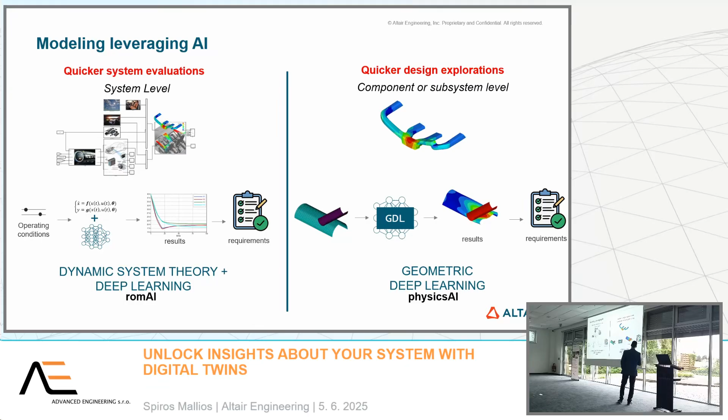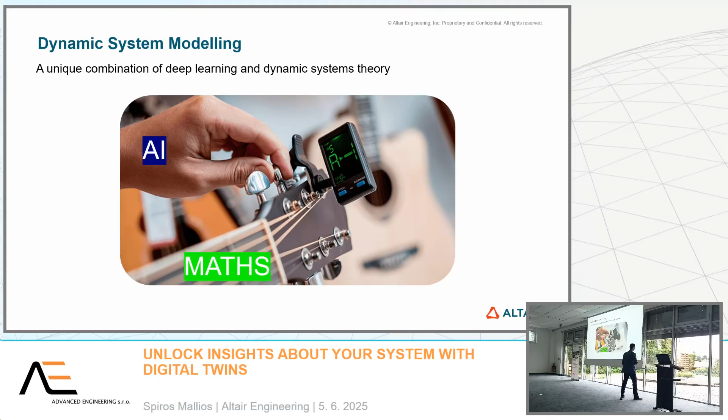This is where Altair comes in. So we have built, let's say, the tuner, which automatically, as you play, is going to identify what is the response of your system, and is going to allow you to tune your system properly. So this is what our portfolio aims to do. Just to give it to you in a graphical sense.

So more into the actual software. For this purpose, we have developed ROM AI, which stands for Reduced Order Modeling, ROM, and AI stands for Artificial Intelligence. So how is ROM AI different from the competition?

Traditional machine learning models are treating, let's say, the data in a dummy way, let me put it this way. So they are trying to estimate the time series of data. ROM AI, on the other hand, is a unique combination that is leveraging dynamic system theory with deep learning. So basically, dynamic system equations, classical differential equations, with some deep learning networks. And when we combine these two, we have ROM AI, which is basically a formulation that allows you to model both static and dynamic systems.

And all that is required from the user is a data set in a CSV format. So you can understand that it can work with data from any tool. The CSV is just exported as text.

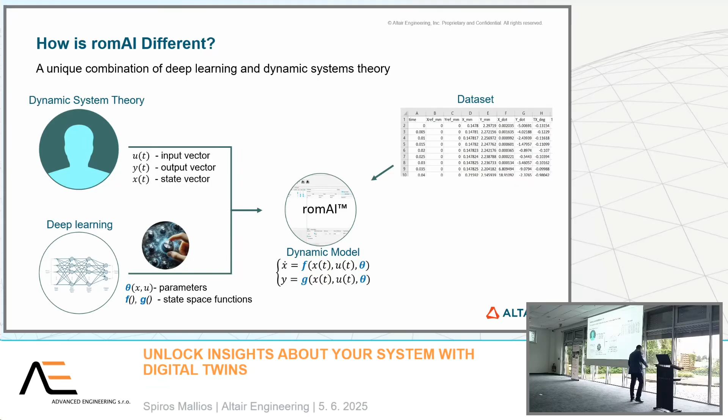Now, I will go a little bit into detail in later slides about the state vector, but state means memory, because when we want to have dynamic systems, we need to also include some memory effect in our model. And memory meaning that the next time step that I want to predict has some memory from the previous time step. So that's why we have here the state vector. But we'll see that more in detail with some practical examples.

So, what is ROM AI? ROM AI is a no-code application, right? We have developed it, like Physics AI, by engineers, for engineers. So there is absolutely no scripting required. You don't write any line of code.

It can be used with both simulation or field data. So around 50% of our customers use it with data coming from measurements, so from actual data acquisition systems.

And it can work both ways. You can build static or dynamic systems. Now, what does static mean? It means that for a given input, I have one single output. Dynamic means that for a given input, I might have a transient response, I might have an oscillation, and I don't just want the final value, I want to see also how this time evolution, how this oscillation is going to look like.

Now, one of the main benefits of ROM AI, apart from being a no-code application, is the deployment. It's very flexible in terms of the deployment, meaning that it can be deployed on hardware and on the cloud, apart from your actual PC, your laptop. That means that it can run into embedded systems, so you have microcontrollers.

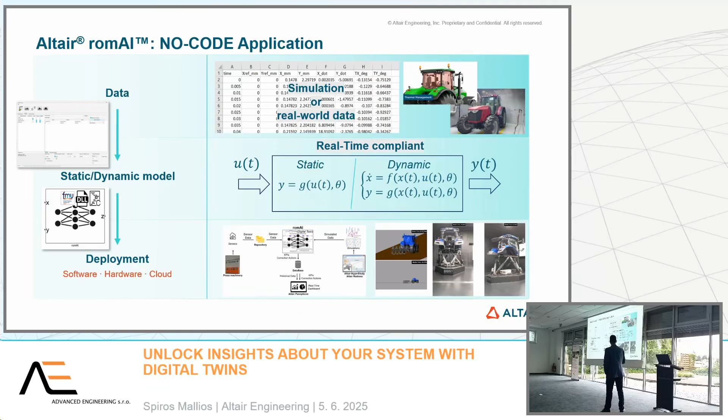All right, so a little bit about the terminology, just to clear things up. We have two names. One is reduced order model, and one is system identification. Which is what?

When we deal with results coming from simulation, so when we have a 3D solver, a CA solver, or a thermal solver, and we want to create a faster model out of our existing data, we call this a reduced order model.

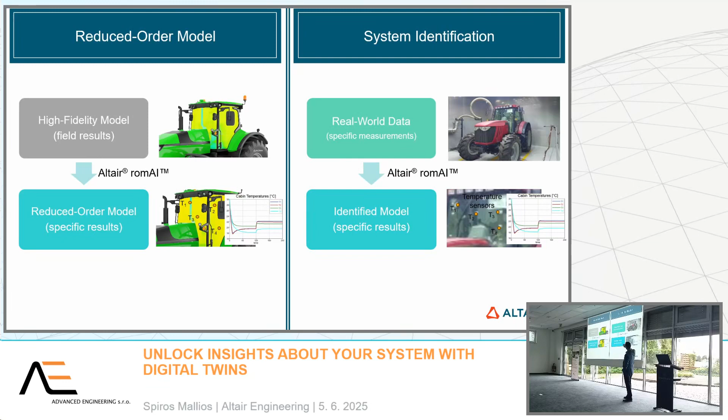So we can do both. You can train a model using both, and if you are, let's say, able to do it on the left-hand side, you can do it on the right-hand side. You don't need to follow a different training, let's say. So...

And basically, in these scenarios, you have multiple design variables. In this case, we were changing, I believe, 3 different design variables, ranging from material thickness, material yield strength, and some dimensions of the actual structure.

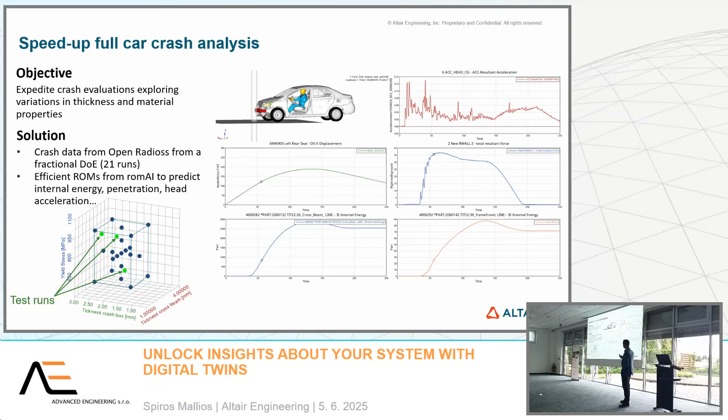Why? Because when we have this reduced order model, we can run an optimization. And why do we want to run an optimization? Because we want to find the optimal combination between all of the parameters. All right.

So this is what typically results from ROM AI look like. You can notice here that, for example, the global intrusion is lined up, line on line. Also the internal energy and some force results. However, if you take a look at, let's say, the acceleration, you can estimate, you can understand that we do not capture the noise.

A reduced order model is not capturing, let's say, noise from data. So if you want, it kind of smoothens also the results for you. It's a built-in effect. Now, arguably, someone might say, okay, this is not noise, this is part of the crash procedure. But basically, think of it like if there is no relationship between your input and the output, there is no way that any AI model can capture it. In this case, it was purely noise from the data.

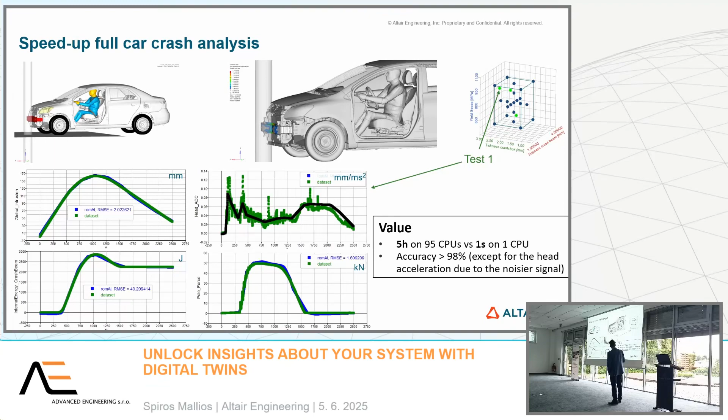One of my favorite categories into which ROM AI can be useful is actually building virtual sensors. So what is a virtual sensor?

Imagine you have a multi-plate clutch system, and some internal components of the clutch system that you know are failing, they are the most prone to failure. The problem is you cannot instrument these internal points inside the complex system, inside rotating assemblies in general. So what can you do in order to monitor things there and make sure everything is under control?

One thing you can do is run simulations, 3D simulations, thermal, and create a model to see what's happening inside there. The problem is that these simulations, because of the nature of thermal and maybe CFD, and maybe some structural interactions as well, take a lot of time. You cannot have this simulation run in parallel with the actual vehicle running. It's impossible. So what do you do?

You run the simulations offline, whenever you want, locally or on some cluster, and then you build out of these simulations a model. We call it a reduced order model, ROM AI, which runs real time and encapsulates basically all the information that is needed from the 3D models. So this model, because it's reduced, is fast, and can now run inside hardware, in parallel with the actual vehicle.

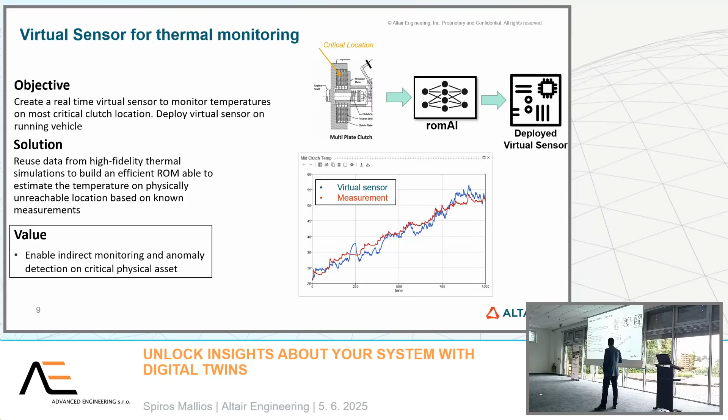And this is where ROM AI is very powerful. This is an example I like very much because it actually won the award in the Excellent AI Application category in a recent conference. We also have a testimonial from the chief engineer explaining how he did things in detail, around a 20-minute presentation. For anyone interested, you can check it out on our website. I'm just going to go very briefly into it.

Imagine that Chery wanted to optimize the controller of their HVAC system built into vehicles, basically to improve passenger comfort. To do that, they were using Simulink from MathWorks, and also KULI, which is Gamma Technologies, outside of Altair, both products. The problem is that in order to do the optimization, they had to wait for the KULI simulations to converge every time, and this was very, very time consuming.

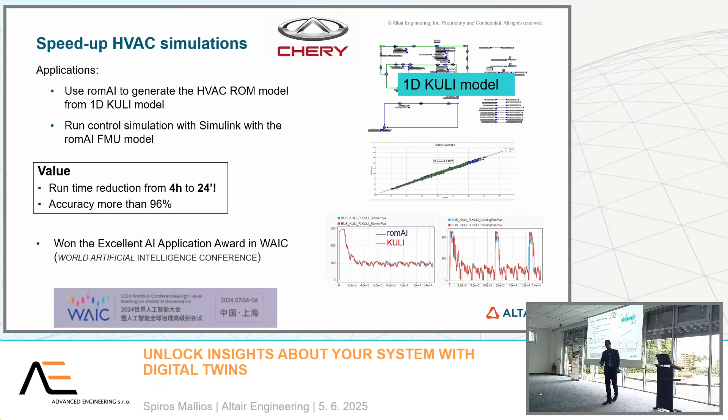This is a public example that we created because something similar was done by Mitsubishi. I presented the Mitsubishi case last year in Prague, so I didn't want to present the same one again, but I wanted to present the public one that we did. And it's still on the HVAC side, but a little bit different here.

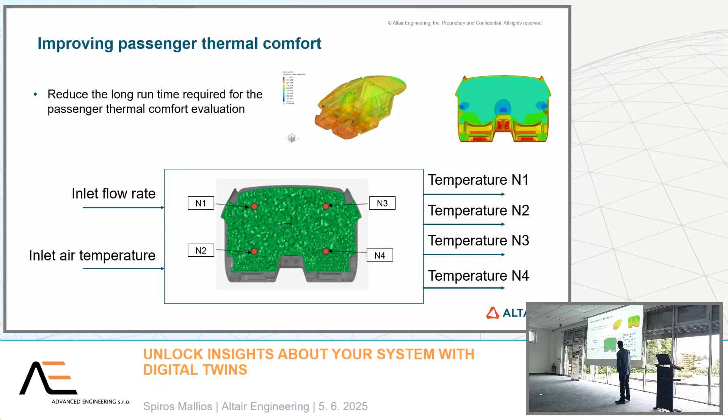Here we use the ROM AI model to predict the temperatures inside the cabin. So based on some inlet flow rates and inlet flow temperatures, we build a reduced order model that predicts the temperatures at key locations. And why is this powerful? Because...

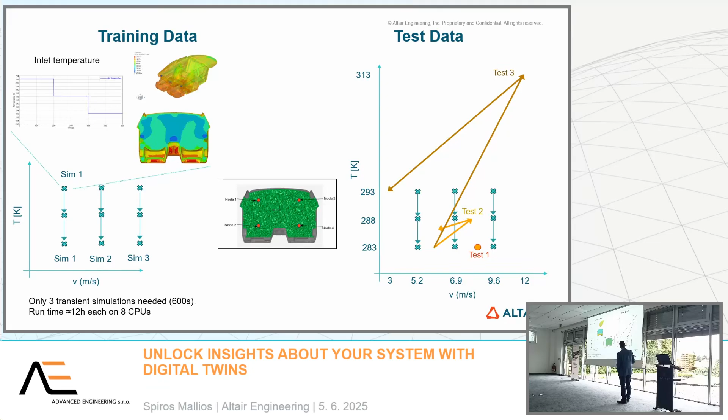Basically, just by running three different simulations, we can estimate scenarios well outside our training range. Our training range is these three blue lines here, where the x-axis is the velocity and the y-axis is the inlet temperature. And we will test it well outside the range to see if our training model is able to generalize well.

Actually we see that this is our training data. And when I test it, we can see the comparison between the blue lines and the green lines, where blue is ROM AI and green is the actual dataset, are pretty much line on line. So we can be confident that this model can work very well outside the training range in any case it might encounter.

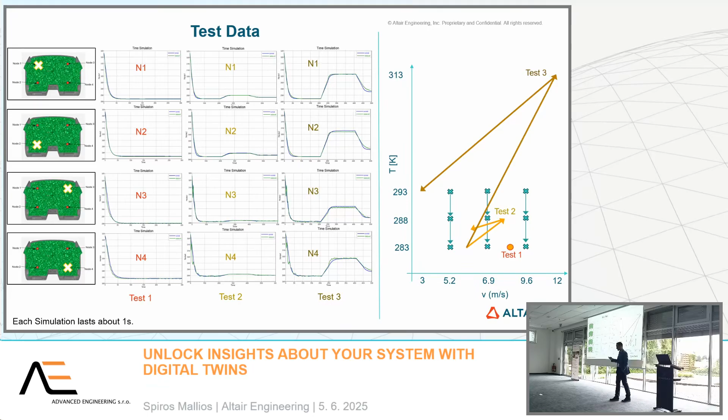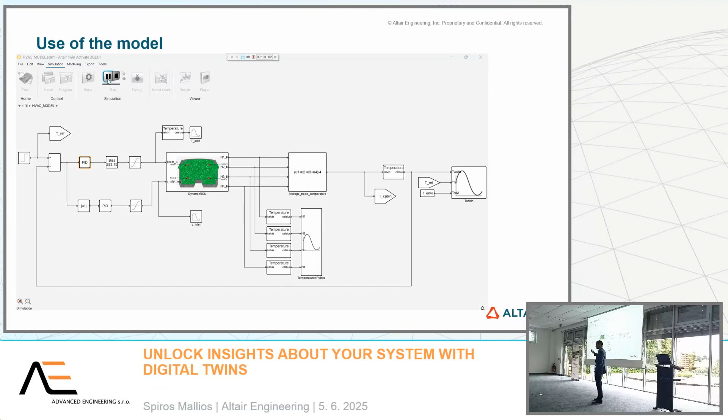If we had the 3D CFD model, to get this result we would have to wait for 12 hours minimum. We just clicked run and got the same results that we would have from the actual 3D simulation. That's the power here.

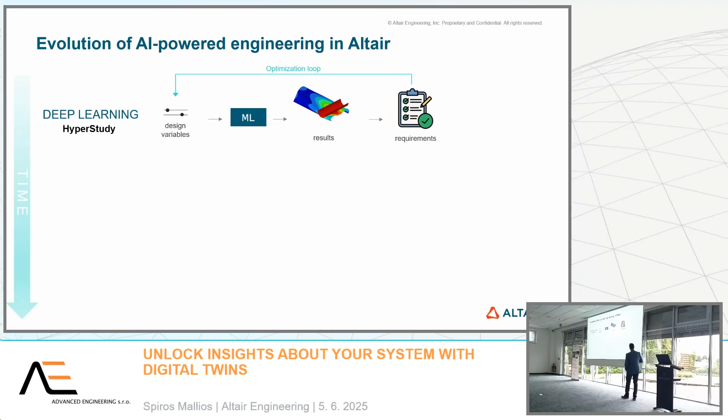So, to close things off, what is our differentiation here? I've had several discussions during the break, and I understand that in the beginning it can be a little confusing as to which tool you should use for each application. The good thing is that we have all of the tools available. So whatever the application is, if it's inside the mathematics, and let's say if it's feasible, because we cannot do magic, you cannot predict something you have not completely seen. AI is not some kind of magic, it's purely mathematics.

It's basically a smart way to reuse your data. But the good thing is that we can cover pretty much any engineering application. We've worked with lots of applications, and we've built the expertise. So I highly encourage you, feel free to contact me, or Advanced Engineering, whenever you feel comfortable, to discuss in future calls what your everyday struggles are, where your challenges are, so we can see, okay, maybe AI can help you here, or maybe a different solver from ours can be helpful here. We don't just want to sell AI whenever we want, we want to sell it where it's actually useful.